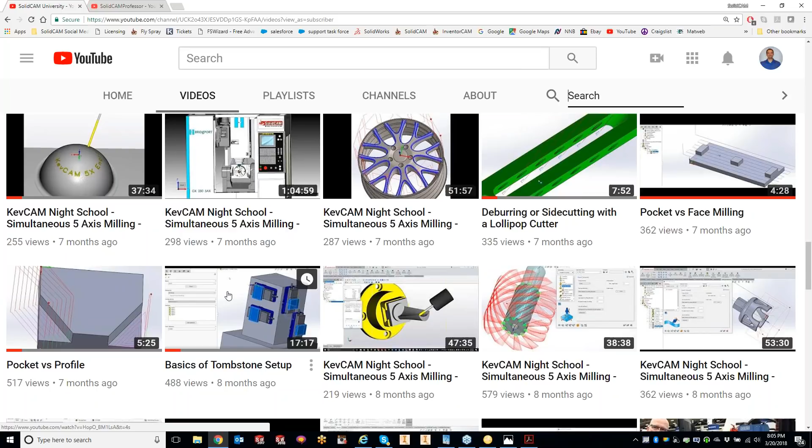What we're going to do today is a sneak peek of what's in SolidCAM 2018, and a lot of this, as mentioned by Steve, came from customer requests. Also our own staff often suggest these changes, and we listen especially to them because many are actual machinists who know the pain of programming parts and what they may be looking for. Listening to people with actual machine practices is very helpful when putting in new enhancements.

I'd like to, can you make me presenter please? Yep, you are, Sid. Okay, and I will show my screen. Hold on a second. I am not presenter. You should be, Sid. For some reason, let me try it again. I'll do it - I got it, I got it, okay, there we go.

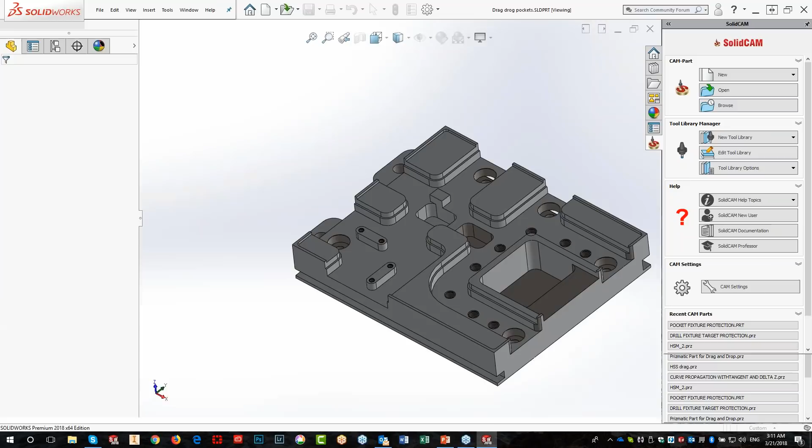What you'll note is as follows: when you open up a SolidWorks part, you already have a SolidCAM tab available to you. Obviously at this point, since no project has started yet, it's empty, but it's here together with your SolidWorks tabs.

It's readily available. Now, there are people I know who don't like working with a task pane, so they'll keep it minimized. Some people don't even like seeing it at all.

What we also have in our SolidCAM tab is the ability to start a new CAM part, open a CAM part, and browse. If the part is already open, we also have an option for save as and close. And we always have the SolidCAM settings available here as well.

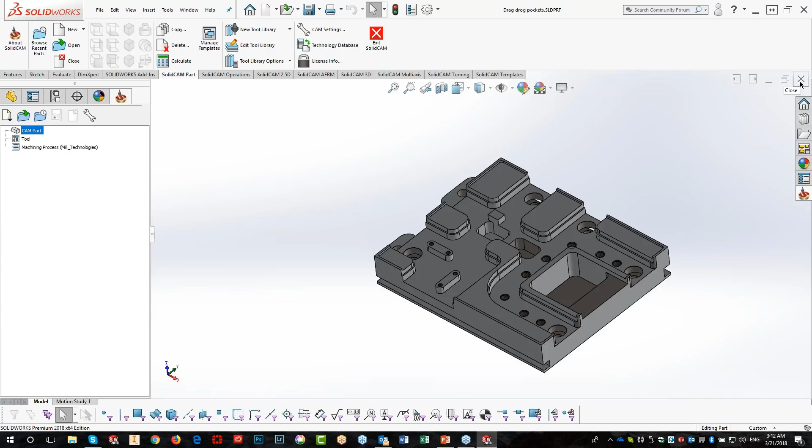These are readily available to everybody at any point, because the tab is already present when you have a part open. Now I'd like to show you another little trick we've added. Not everyone may want to use this, but I'm going to close the part for a moment and go back into my CAM settings.

In my CAM settings, we've added a feature called 'Create New CAM Project when opening a CAD part.' If I click that, along with Auto Select Project Location, and in my automatic CAM part definition I'll have all of these clicked as well.

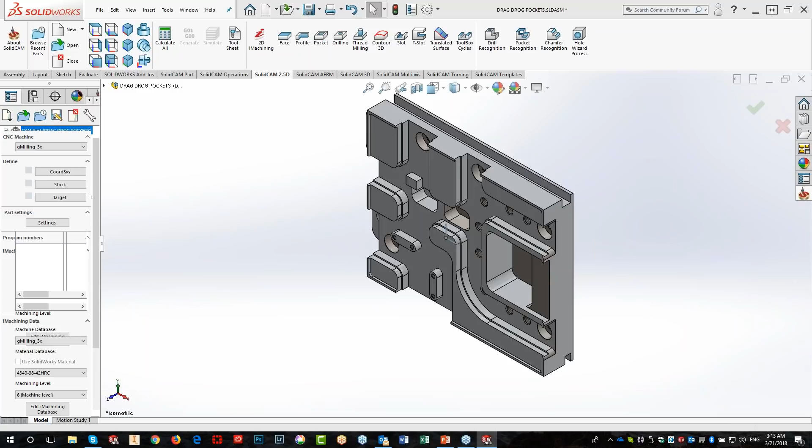Look what happens the moment I open up a SolidWorks part. I'll open up the part, and in just a few seconds I'll be ready to work. We have a coordinate system, stock, target—everything is already done, and I'm ready to start working.

And the home position is created exactly the way you have it defined inside your CAM settings, as to where it goes.

Now, I'd like to apologize to everybody beforehand. I am working right now, like I said, with a development version. As we all know, sometimes in development versions not everything is perfect, and there may be some crashes in the middle that I know about. So bear with me if that happens.

Okay, let me move on to my next feature. One of the pains we always have when creating stock is that if you want to create a box around the part, you would normally go into your stock creation. I'll open that up. You have 'defined by box' and 'relative to model.'

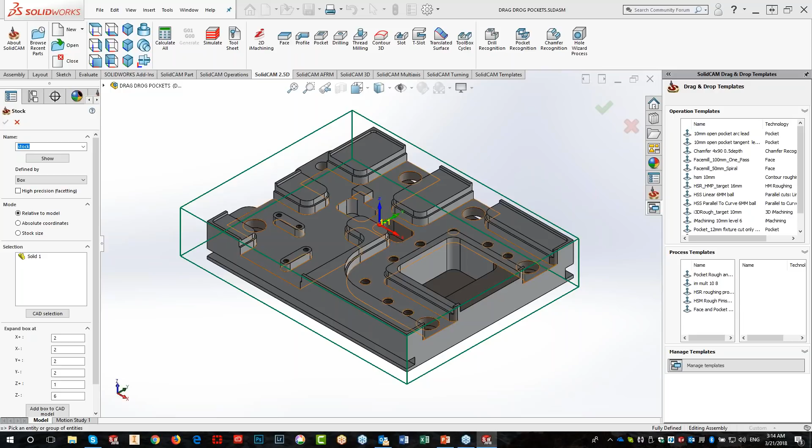You click on the box, you see a part, and say, okay, that's my part, and I want to add this amount of material. By the way, you see the values here—I'm working in metric, sorry about that—that's why it's not 2 inches, it's 2 millimeters. I want to add this amount of excess material on each side, which is nice, but at this point you still don't know what your actual stock size is.

So what you normally do is go ahead and add a box to your CAD model, start measuring each of these lines, and say, okay, that's the stock I need. But then what happens? You call up your manufacturer, the guy who actually gives you this, where you actually order your steel or aluminum.

And you say, okay, this is the stock I have. What stock do you want? In other words, they won't have exactly what you want unless they cut it up for you exactly. They may have rolled out bars of stock and say, these are my standard sizes, what size do you want me to cut it from? Then you have to go back and redefine your stock exactly according to the way he has it.

So what we've done here is we've added another option, and this other option is called stock size. With stock size, when I click on the parts...

If I go further down over here, you'll note that we have a box size instead, in X, Y, and Z. It can be either metric or inch. And here you see exactly what your minimum stock is and exactly what your part size is at this moment.

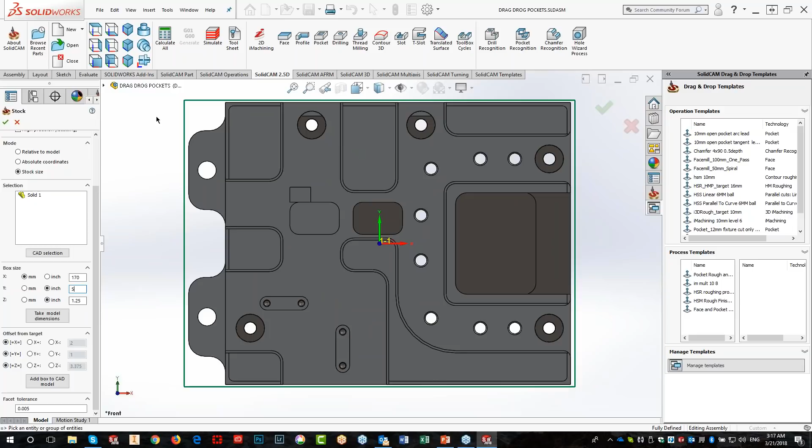When I'm looking at my Z, I'm saying, you know what, I don't want my Z to be only maybe 1 millimeter above the top. So let's go a little further down, and you can see we have offset from target.

Right now, as default, it's set at equal X, Y, and Z. So what I want to do is say, okay, everything is good for X and Y, but for my Z, I only want my Z plus to be 1 millimeter.

And what it does is it takes the entire box and moves it down, and now you know your exact stock size, and it's already ready for you exactly the way you're going to get it from your material supplier. Okay, so that's as far as the stock size goes.

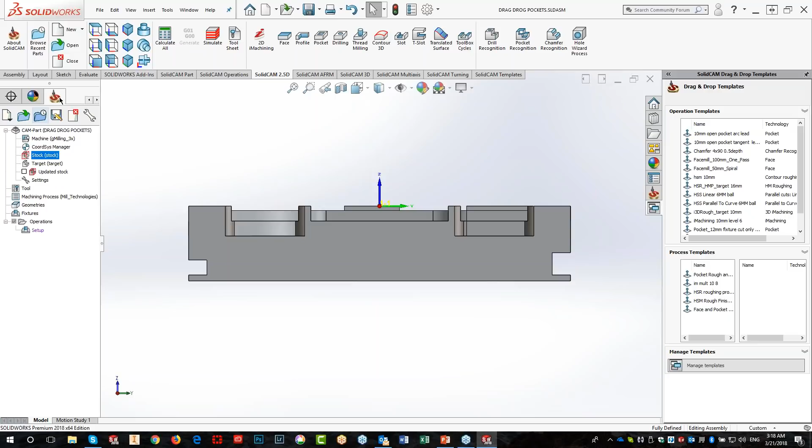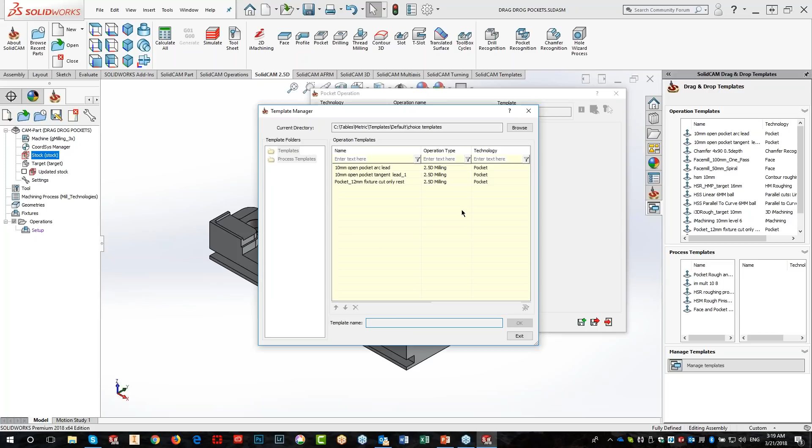Now let's go to our next thing, and this part is really, really, really cool. I'm sure a lot of you work with templates, and the way you would use templates in the past is maybe you go into, let's say, a pocket operation and load your template from your list of templates over here, and then click on that and say okay, and it brings in the tool.

All you have to do is add your geometry, do your levels, and then do save and calculate. Well, I'm going to go out of here.

What we've added, and you can see this now on my right-hand side, inside my task pane of SolidWorks, is something called drag and drop templates. So say I want to have a face operation on the top of this part.

You see I have a face mill template over here. In fact, I have two of them. I'm going to use the one that says face mill 50 millimeter, which is about 2 inches in diameter.

And I'm going to use the spiral cut, that's the technology I decided to use. I'm just going to take it and drag it to the part, to this face of the part, to the top face of the part - okay, even though it's not the top. And you'll note I already have an operation created with the toolpath.

Okay, now the rule is that when I drag it to a surface, it'll use the home position that is perpendicular to that surface. Now, you may ask, I have only one coordinate system here. I want to take a face mill and drag it and put it onto this face as well. Well, let's see what happens if I do that.

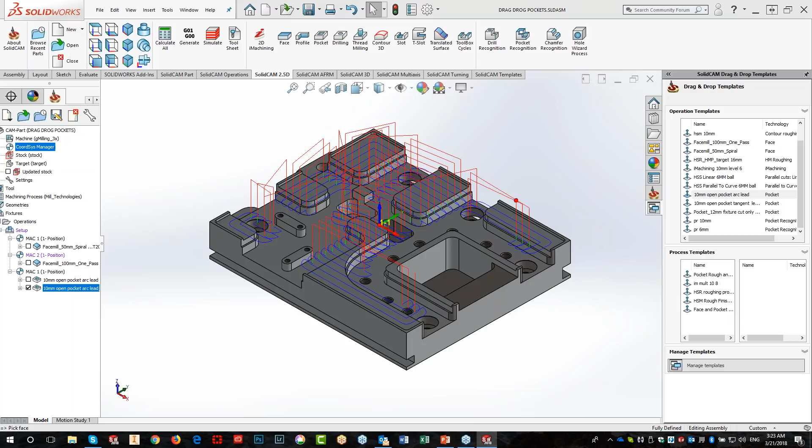I'll start dragging it, but I'm going to my keyboard. I'm going to hold my control button. And then I'm just going to let go over here, click on this one. As long as I'm holding my control button, nothing will happen. Now I'm going to let go of my control button, and it's going to create one operation with all those geometries, with all those chains already inside that one operation.

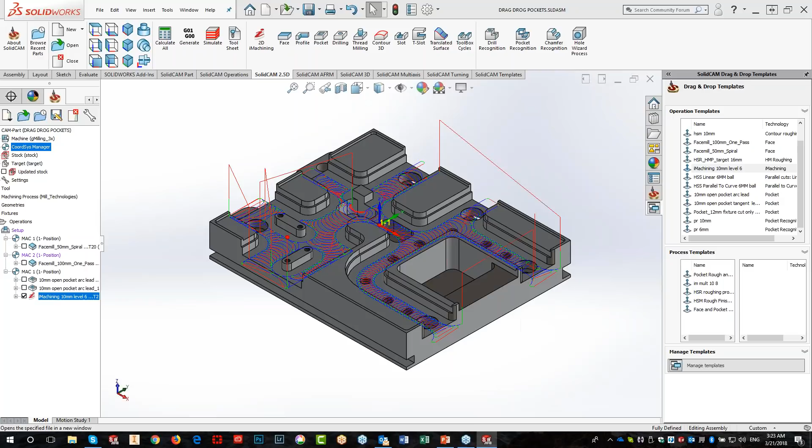Now, this works well, not only here, but it works well also for iMachining. I can take an iMachining operation, drag it to, say, this surface, and it'll build a template with your iMachining. iMachining takes a touch longer to calculate, but you see you have my iMachining toolpath there as well. This will work also very nicely.

Let me just delete everything I've done over here. Delete.

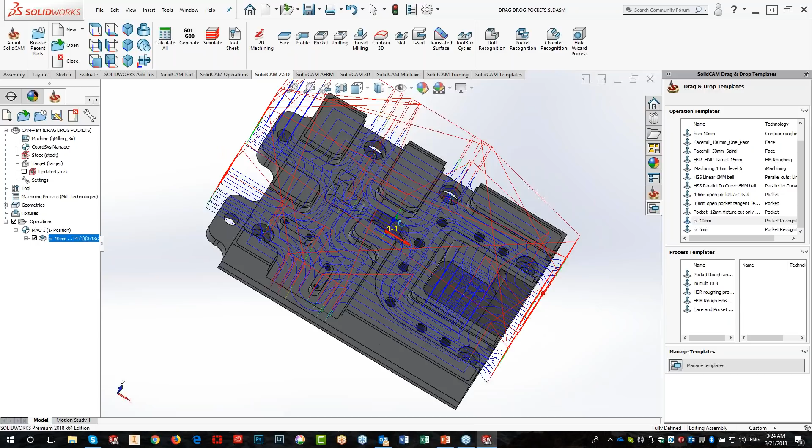It'll also work very nicely if I were to use pocket recognition. Let's use pocket recognition, and I'll hit. Doesn't make a difference now which one of these faces I hit because it can recognize the entire part. It'll build a template operation for this part using the pocket recognition option. Obviously now it's recognizing all the faces. And now every single one of these pockets has a toolpath on it.

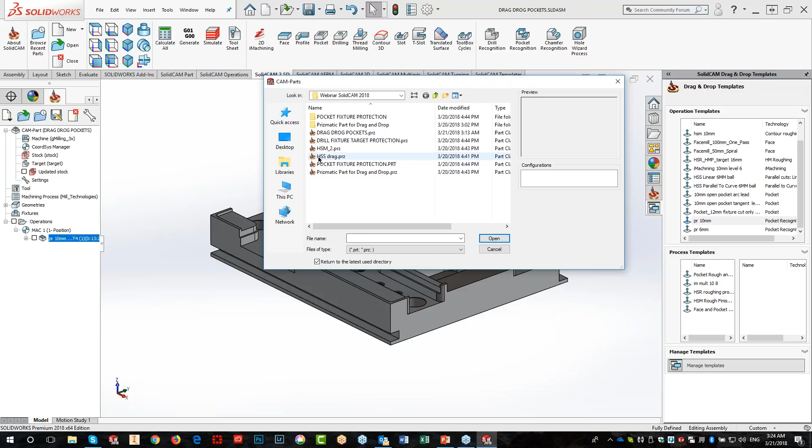Okay. Now, we have this also for HSS and HSM. Now, with HSS, it's a little tricky. And I'll show you what I mean. I'm going to load a different part. I'm going to load this part over here. And let's say I want to do an HSS operation on this surface.

Now we know that with HSS, the geometry does not need a specific home position. So the question is, if I drag and drop something onto this surface, what home position am I going to use? Another question would be, with HSS, touching a surface is not enough in many cases. Touching a surface, I also may need a certain boundary. So for those particular cases, this is what we've done.

I have here right now two different HSS drag and drop options, I believe. Here we go. One with linear and one with a parallel curve. Let's first take linear. I'm going to drag it to this surface here. What's going to happen right now is it's going to pop up a question for me to choose which home position I want. So I can go in here and choose any home position I want. I'll click on OK, and then it'll create the operation. Because linear does not need any kind of boundaries, it just needs the face. So there's my toolpath using the HSS.

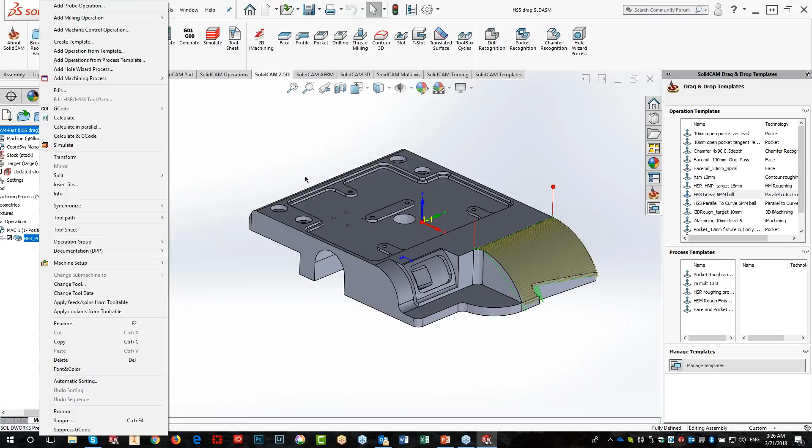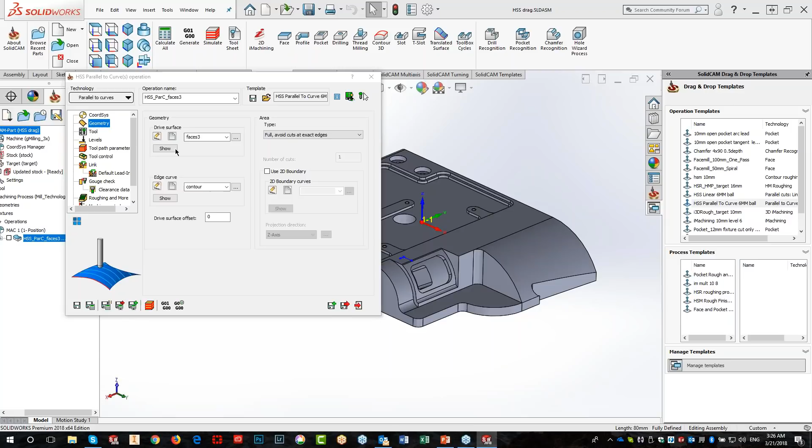What happens if I use one that uses parallel to curve? I'll do the same thing, drag it on that surface. We'll have this option over here again, but then it'll open up the operation, and all I have to do now is put in the curve that I want. For example, if I want it to be parallel to this curve, I'll just add that curve in, accept it, and then calculate it exactly with all the information already inside the template. And we have our toolpaths already created as shown over here.

Now, this works on drag and drop templates, but it also works on process templates. Let me open up a different part. Let's say take a part like this one over here. Now, this is a part you can see that has all different types of pockets and stuff like that.

And what I'd like to do in this particular case is use a process template. Now, when I click on a process template, you can see exactly what's inside of them. Here I have two different pocket operations: iMachining multi-tool, HSR, HSM, and face and pockets. I'm going to use face and pocket recognition for this particular part. I'm going to take it and drag it onto this face over here. It doesn't make a difference which face, because the face mill and pocket recognition will use that entire part and is building the template operation.

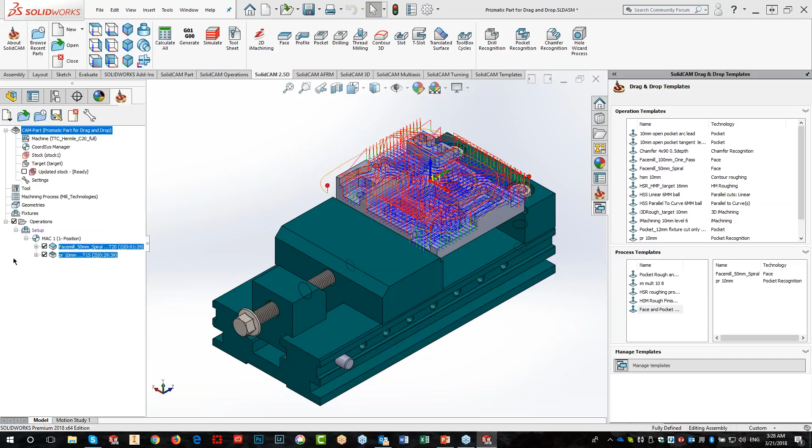For those guys maybe a little fresh on this, what Sidney did is he created a template. By creating a template, all he did is created an operation and saved that operation out as a template. Where other companies, you have to build this huge, large matrix in an Excel file to tell it to do a pocket with an end mill if it meets this parameter and all that stuff. So this is very easy to use here. And we're not hitting the easy button here and saying program my entire part. We're using a powerful software and making it easier for you guys to use.

Exactly. Basically, it's using the technology that you use because you're the one that created this template. Absolutely. And I'm going to create templates also in a moment, so I want to show you what happens when you create a template, you'll see it here automatically as well. Okay, now I've used this, as you see, on this part.

Let me take a different part. Okay, let me close this part. Oops, sorry, I closed SolidWorks accidentally, my mistake. So I'll reopen SolidWorks. It's 3 o'clock in the morning, don't expect me to be... Sydney's just working on his 4th cup of coffee already for the day.

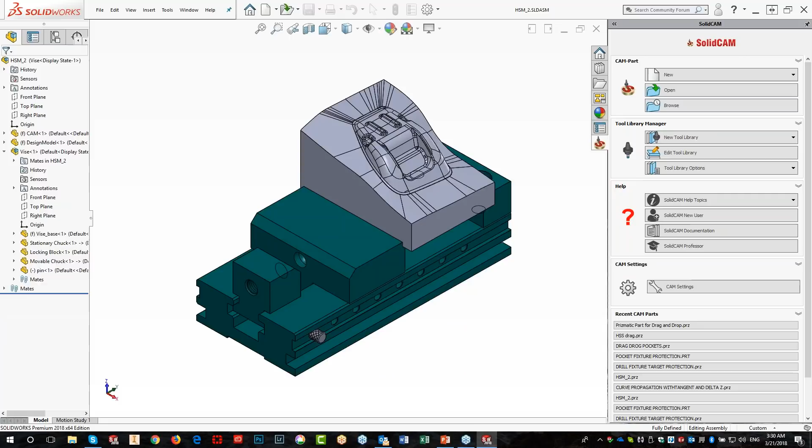Okay, so I'm going to go to my task pane. I love the task pane. I don't know what, ever since I've been working with the task pane, I don't know how I've been working without it. Okay, so let's go to open, and I'm going to use this part over here. Now, this is a nice little 3D model over here.

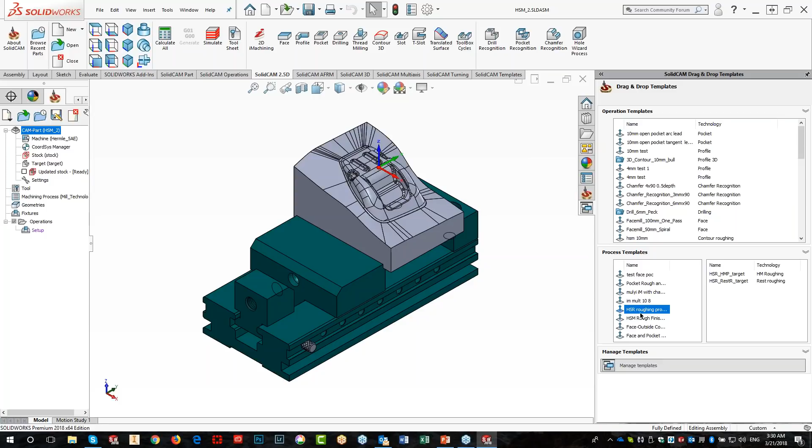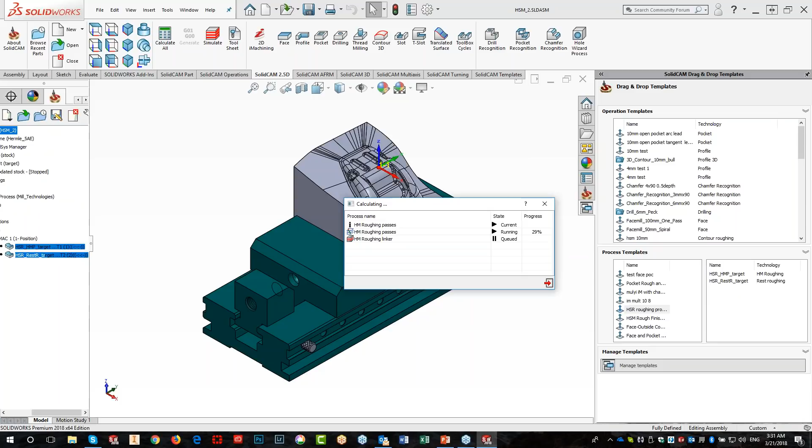What I'd like to do is use one of my process templates to create HSR roughing for this part. I have some of these objects over here, and you'll see I actually have 2 different operations inside my template. All I have to do is drag it to any one of these surfaces. Since no home can be detected, I'll just click on the home I want. And there we go, we have our operations being calculated, and in just a couple of moments we have our operations already done. Again, like I said, any one of these operations is just a regular operation, and all you have to do is go inside if you want to make any changes, just like any other operation you may have had in the past.

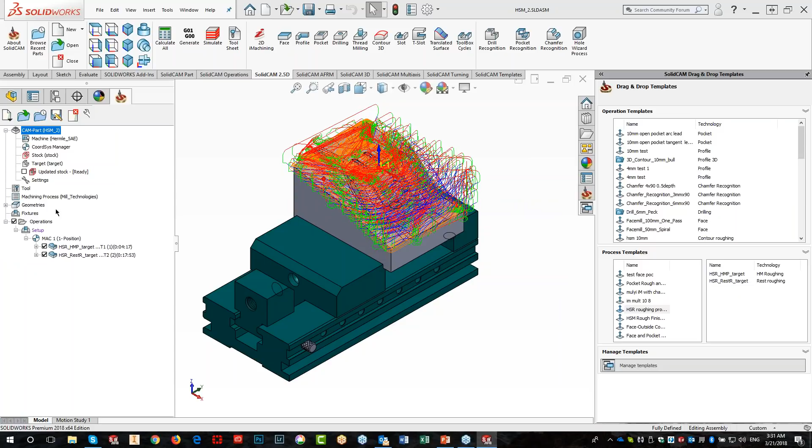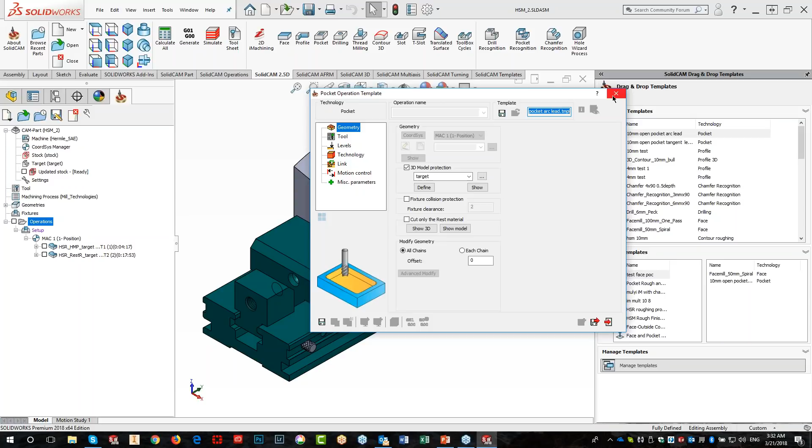Just a little bit more on the drag and drop. These drag and drops over here, we also have the manage template added at the bottom. If you click on that, you can go ahead and manage all your templates. In addition, if I right click on the drag and drop, I can show and edit, opening up any one of these templates to make edits and changes the way I see fit. I can do that or double click on them and it'll open that as well. So it makes going into and editing templates a lot easier.

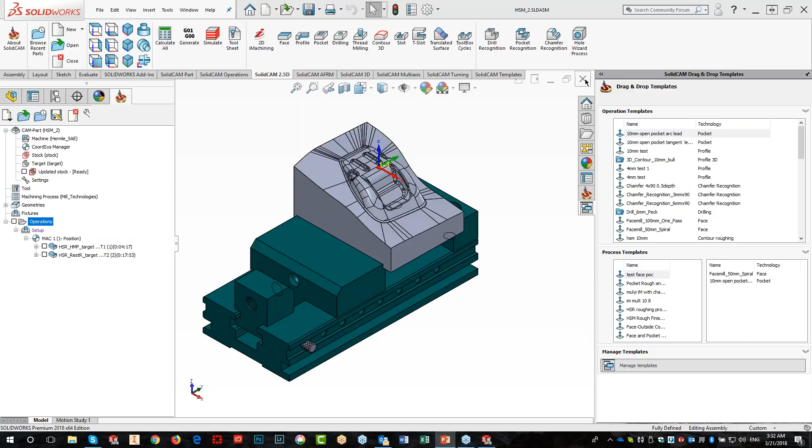Okay, let me go now to my next little step that I'd like to show you. This is going to be fun. I'm going to open up another part. We'll go to SolidCAM open. Like I said, we will have these every now and then.

This is one of the great joys of beta. No, again, this is a dev version, so this happens. Yeah, and that's why we go through as much testing as possible for you guys, so you don't run across any of these issues at all. Right.

Okay, again, I'll load the parts. Here we go, we'll go to open. And I'm going to drag out this little part over here.

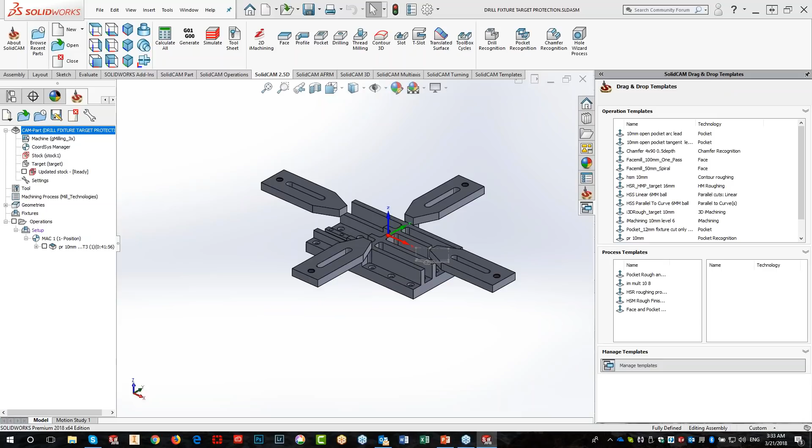Now, what you're seeing here is a part that has drill operations I want to create on this part itself. I'm not even going to use a drag and drop template, so I'm going to close the task pane now so it'll be a lot easier for you to see. You can see I have these holes over here that I want to drill out, and you can also see that I have clamps over the part, different fixtures over the part itself. I've already created an operation over here.

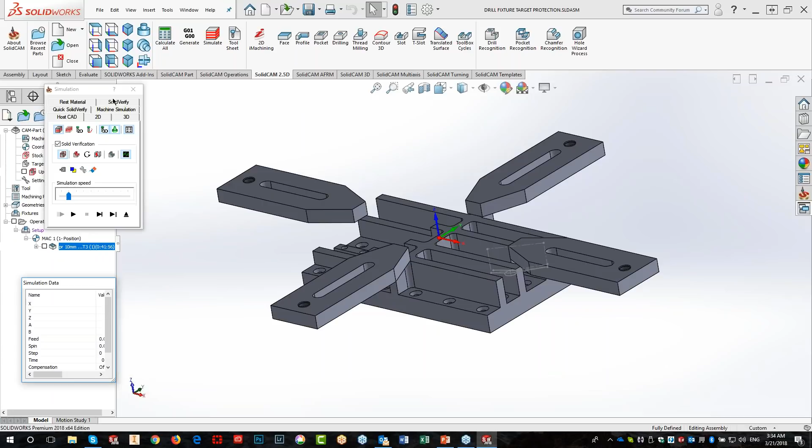I'll just run the simulation of this particular operation, SolidVerify. Let me do that a lot quicker. You'll see that that's the material I have left over, and you can see also there's material left underneath the clamps itself. Now, there are holes over there underneath the clamps. And you'll also note that the holes are all the way down at the bottom over here.

So I'm going to start now a drilling operation. I'll create my geometry. Let's do this in the top view, it's a lot easier, and I'm going to create my geometry using these surfaces over here. I have all those holes that I want to use, and I'll accept that.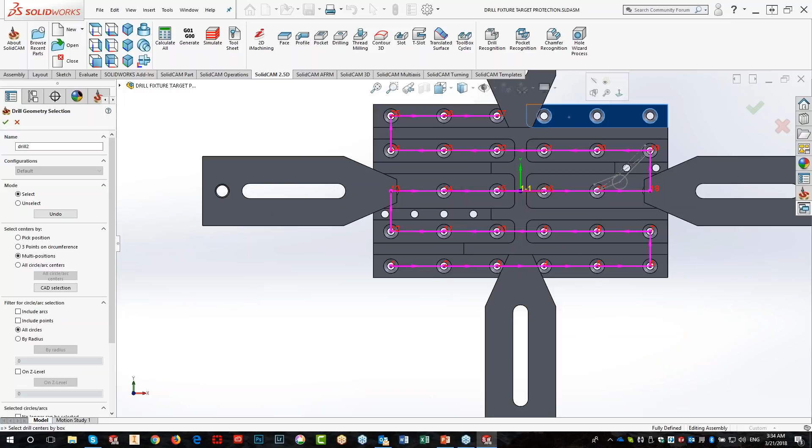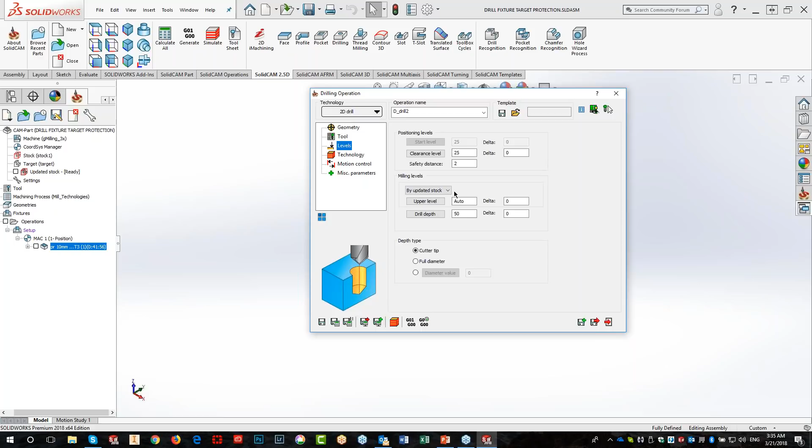I'm going to use a particular drill that I already have ready for me, 6.6 millimeter, that's the size of the hole itself. What I'm going to do now is go to my levels. In my levels, you'll note we have something called updated stock, so in other words, it's going to look at the part and see where your stock is at that point, and that's going to be your upper level. My depth, we'll leave it at 50 millimeters, full diameter.

Now let's also go into my technology. In my technology, we have something called Fixture Collision Protection, so it'll automatically recognize where those clamps are and make sure I don't go drilling into those clamps. I can also have a fixture clearance protection distance, how far away do I want to stay from the fixtures. And we also have added a new option here called links between the holes. In this particular case, I could go safety distance from upper level or shortest distance. Now, this is really cool.

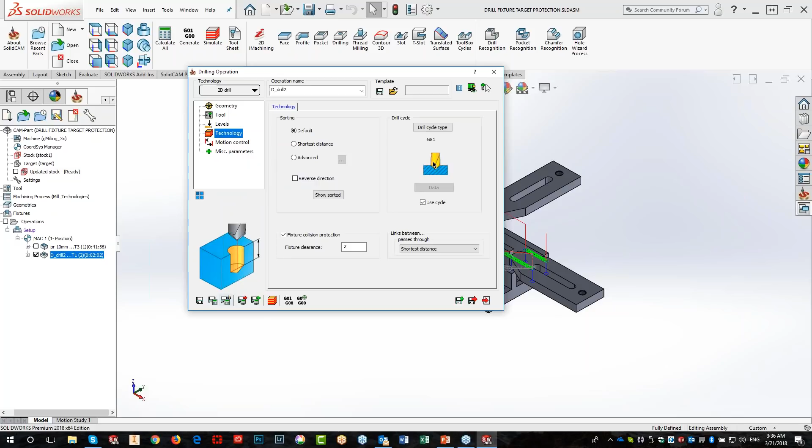I'll show you what happens over here. I'm going to hit calculate, and what you're going to see is something very interesting. My tool path, my drilling will start at the level of the holes itself, but it'll go from one hole to the next directly over the material over here.

Now when it gets to a clamp, it'll jump over the clamp. Let's take a look at it in our simulation using SolidVerify. I'll do this one step at a time, and you'll see my tool will drill down, go directly to the next hole. Now it's going to jump up above the clamp, skip those holes because it was right next to those clamps. Go over there, go over here. Now my next hole is on the other side of that wall, it's going to jump over that wall and go to the next hole.

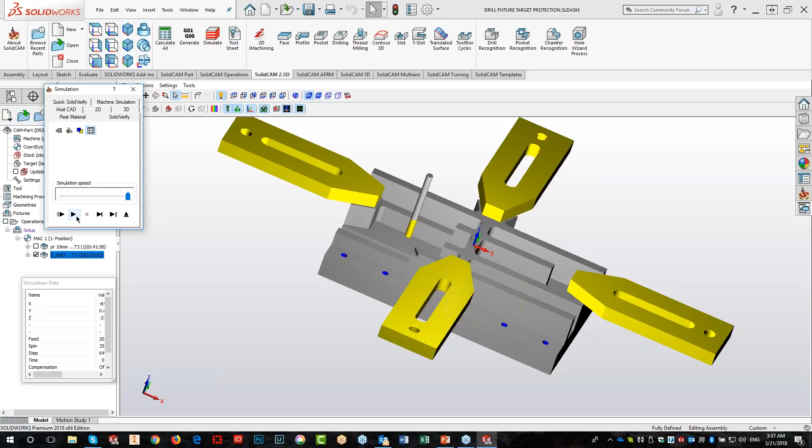Same thing over here, there's another wall it's going to jump over. Now over here, what it's going to do is jump over this little wall that I have over here to get to the next hole over here, also skipping the hole that was underneath the clamp, thereby also creating all the holes that it was able to create.

This will really help with eliminating cycle time, especially if you guys are running production and custom stuff, eliminating a lot of the cycle time of retracting all the way up to that surface plane since we're using those clamps for you guys.

Let's take a look at what happens if I take my first operation and suppress it. In other words, my stock right now has changed. The stock has not been machined over there. You'll note that my drill operation just has to be recalculated.

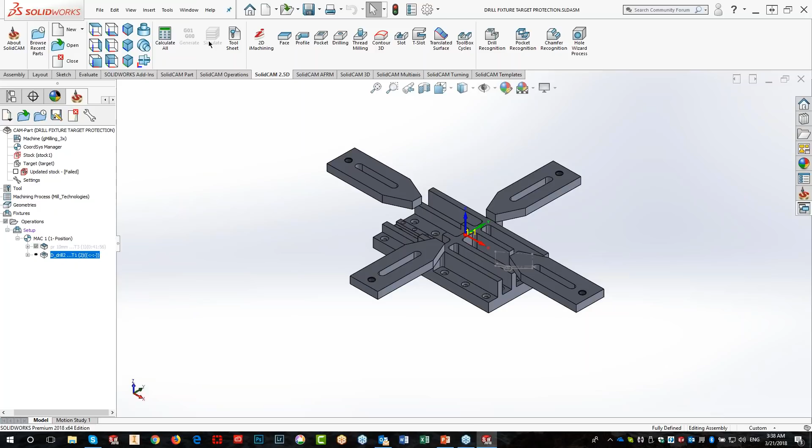I'm going to just calculate it. I'll click, actually I can just do calculate all over here. You'll see that this time the drilling is starting to again simulate from the top. It'll jump over my clamp, but the starting of the drill will start from the top, and it'll go down to exactly where it needs to go down, and it'll complete whatever you need to do over there.

Now you'll note also one little thing. When I click on this, you see this arrow over here? This shows us that we have this in SolidWorks as well. It shows any associated operations. So if I have an operation that's associated to several operations, it'll show it to me.

That's a good sign for me to do the following. Let's say I'm going to unsuppress this now, and I'm making a little change over here. I can click on Save and Calculate with Related Operations, and it'll calculate that particular operation I'm on right now, and it'll also calculate any related operation as well.

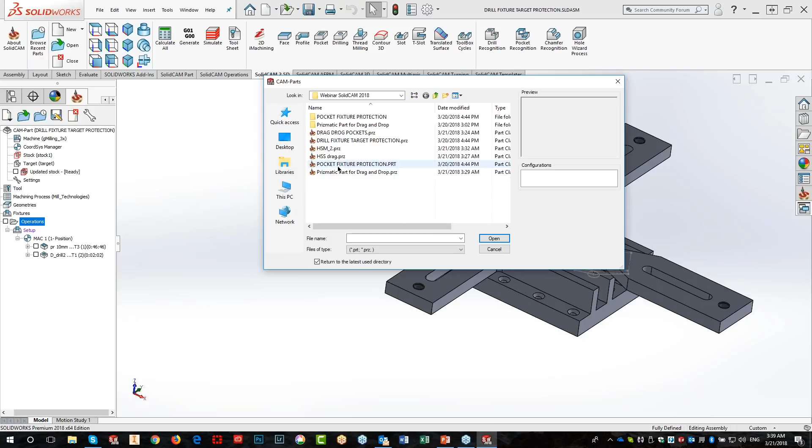Okay, let's move along now. Let's take a look at a different part. I'm going to open up a different part: pocket fixture protection.

Just like we had in drill, we have the fixture protection. We also have it now in pockets as well, but we have a couple more options in there as well.

Let's take a first look at this part. You'll note I have two different setups here. If we take a look at my configurations over here, I have my default setup and I have setup 2, two different clamps in different places. So I'm going to take my first operation, my first setup.

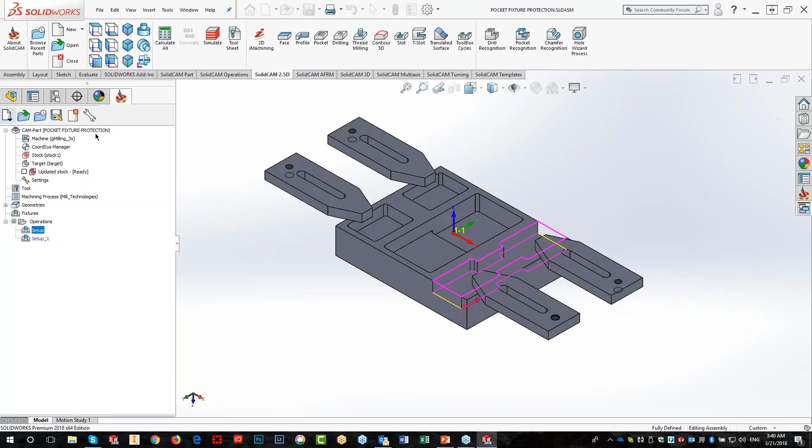I'm going to take a pocket operation. My geometry is going to be this surface over here, where it automatically, as Kevin mentioned before, recognizes the open edges. I'm going to use an end mill, say for argument's sake, a 10 millimeter end mill.

Let me go back to geometry for a second. Note we have what we call fixture collision protection, just like we had over there. And we also have something called cut only the rest material. I'm not going to use this time now, I'm just going to leave it there without it. I really don't need it at this point.

I'm going to calculate. Okay, I have my levels, all that is as usual. My levels is down to that surface over there. My technology, I like working open pocket using a profile strategy. Links, I'm going to use it as an arc, whichever way everyone likes to use it. Okay, I'm going to calculate that.

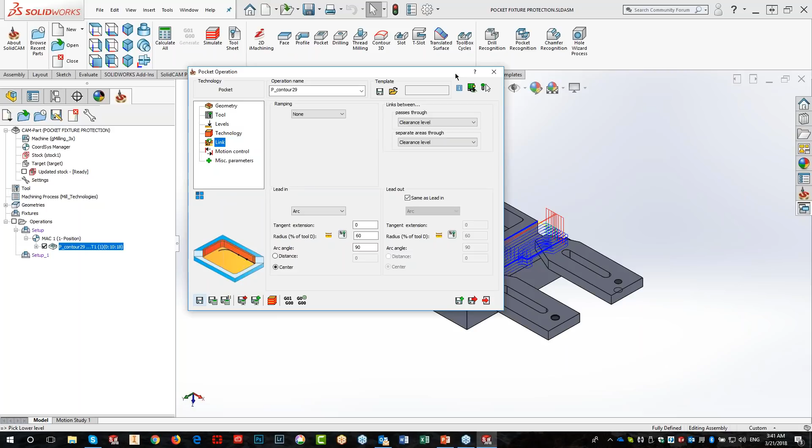And you'll note the following: it did the pocket, but it worked around the clamps.

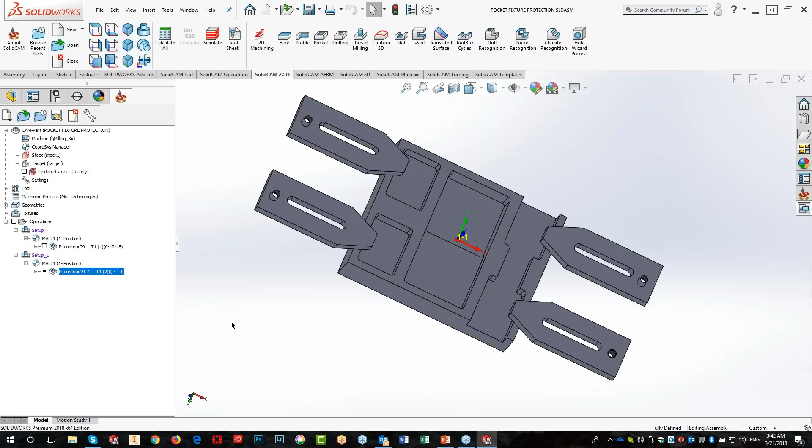Now, what I'm going to do, I'm going to take this same operation, copy it, and paste it on setup 1, where I have my clamps in the other direction. In this particular case, I'm going to add the option of cut only the rest material. So it's the exact same operation I had before, but this time I added also cut only the rest material.

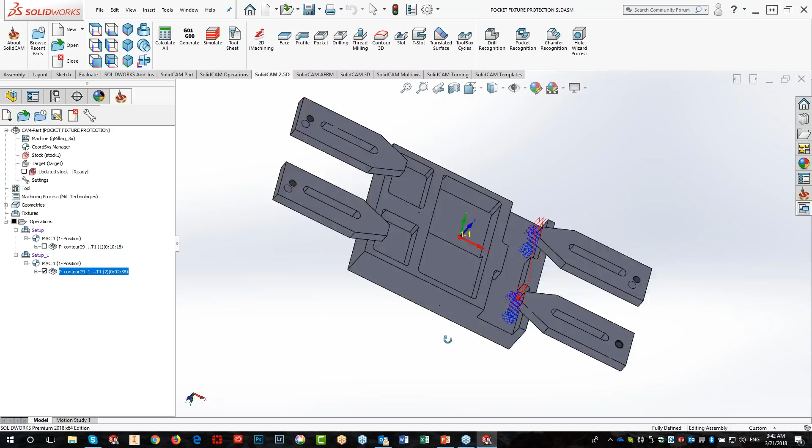When I calculate that, what you'll see is that it's only machining where it needs to be machined, in those areas over there. That's after you've already moved the toe clamps out of the way.

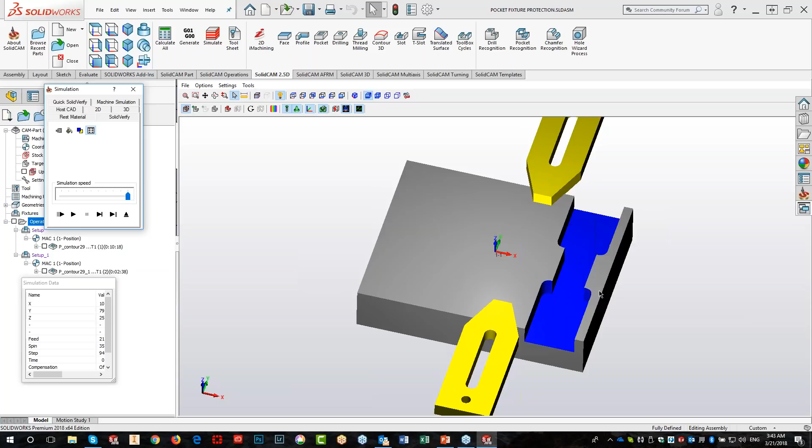That's correct. So if you go to your configuration, get that simulation, you'll see this exactly a lot better. We have our first operation. Now you see our clamps are moved. And then we have our second operation, finishing off those studs that were left over there.

Now, the same is true, not only here, but also in pocket recognition. But let me just delete these operations here for a moment. And you can see, because we have the cut only rest material, these operations are now related to each other. Let me delete this now. Delete.

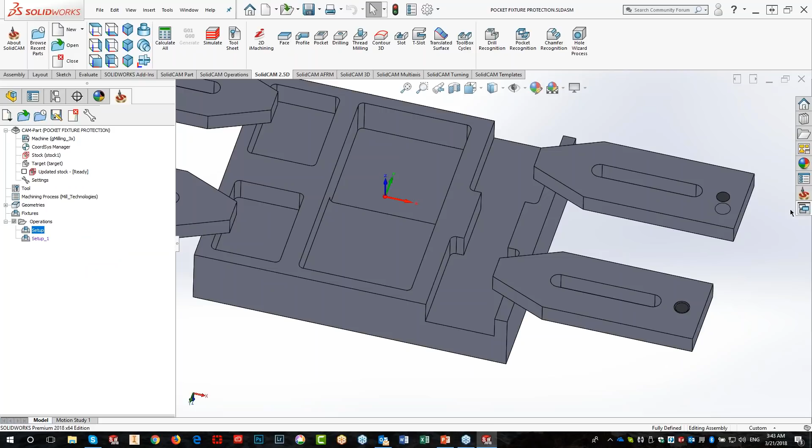Remember we talked about a couple minutes ago about our drag and drop templates? So what we have here is I created a pocket operation that already had inside the template itself. Let me just open it up for a second. It already has inside fixture collision protection, and it also has cut only rest material.

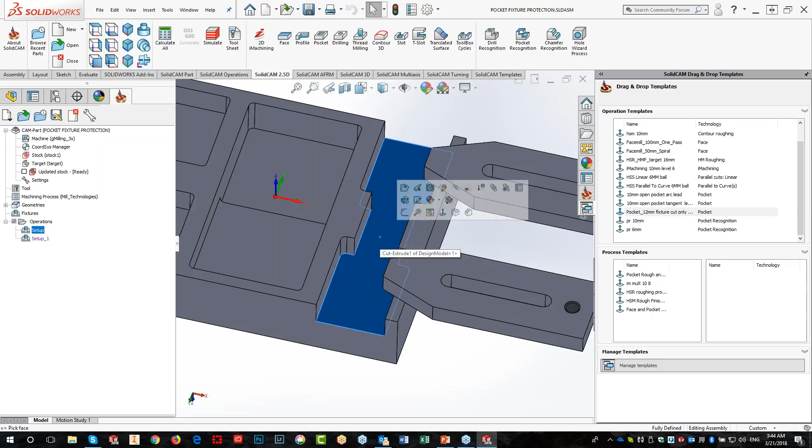So what I'm going to do is just take this and drag it onto that pocket over there. As you can see, it did that. And now I'm going to go to setup 1 and drag and drop it again to that same face. Same operation, just different setup, sees the rest material, and cuts exactly where I need it.

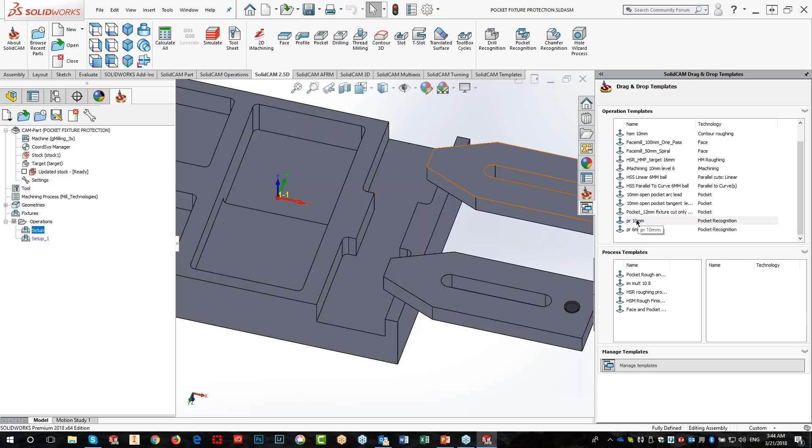Now, this is also true. The whole idea of pockets with fixture collision protection, we've also, correction, I'm going to delete that for now, is also true, not only in pocket, but also for pocket recognition. Let's take a look at this pocket recognition over here. I'm going to add fixture collision protection to it. You see, I made a little edit as we're going along.

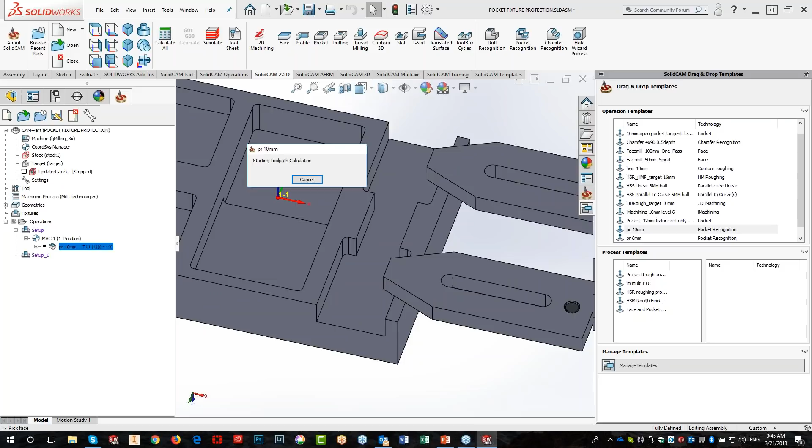If I were to take that and drag it to my part at setup 1, it'll do all the pockets and move around the clamps over here as well as these clamps over here. Go to this part now, do the exact same thing. Don't fail me now. There we go. As you can see, it worked exactly where it needed to work.

So the drag and drop options is very simple. Now let me just go back also, and you see the drag and drop together with the new features of collision protection, rest material. All of that comes in extremely handy now when you have templates and using the drag and drop templates. Now let me go into a simple operation that I have here.

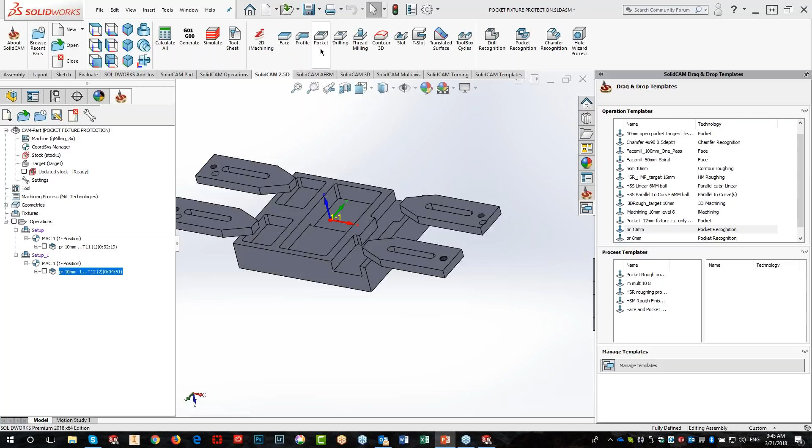Just for argument's sake, one nice thing too with this drag and drop for those of you guys that like to use 3D iMachining for your prismatic parts, this works also very nicely. So drag and drop that 3D iMachining toolpath on there. Don't have to worry about those feeds and speeds for you guys on a 2.5D part. Also works out very slick.

And if you guys behave yourselves, I'll even show it to you in a moment as well, what happens when you drag and drop the iMachining 3D iMachining operation onto a prismatic part.

Okay, but let's go back in here for a moment. I'm going to go into here and use all these options over here. I may even, just for argument's sake, just create a geometry, levels, irrelevant for now, technology, open pocket, use profile strategy, approach from outside, whichever one I want to use, all these kind of things.

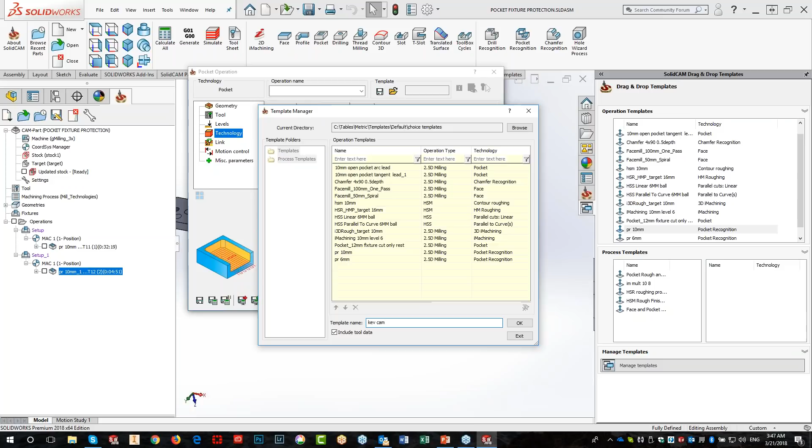What I'm going to do is I'm going to create a geometry. And so as you can see the name of the template, I'm going to create it KevCAM. The name of this particular template. Click on OK. I'm going to exit the part without saving anything.

In this particular case, there is a little bug over here that I just noticed. What I will do is I will just reload the part. And what you'll see is that I have that template there. So any template I create will be available over here as well, immediately. Actually, it will be immediately. The fact that I had to open and close, that's a different story. That I have to scream at somebody for that.

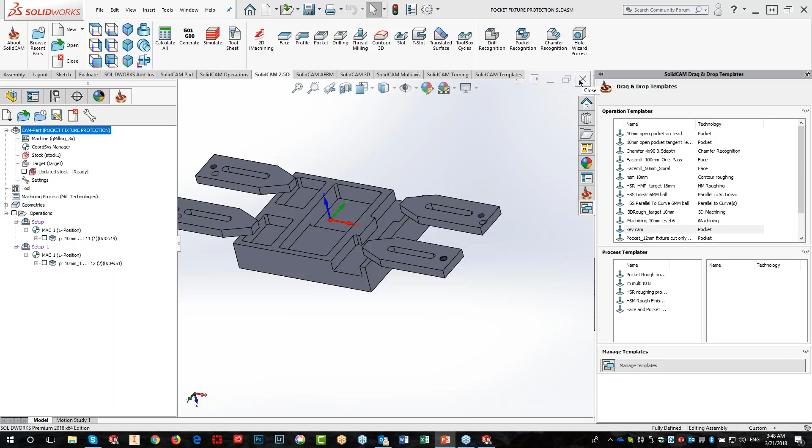Anything else? Let me see right now. Okay, now let me just show you one last feature. I did promise I would show you iMachining. So what I will do is I will reload that little part that I had over here, this one over here. I'm going to delete these operations.

Now I have a template here. iMachining, let's go to technology names. I have one here called 3D iMachining. I'm going to take that and drag it to my part. And as Kevin had mentioned just before, there's my toolpath on the entire part using iMachining. Done very quickly, very simply.

Nice and easy, and you don't have to worry about feeds or speeds and all that good stuff. Right, exactly. And again, every single one of these operations, you can go into them and edit them. Let me delete this now.

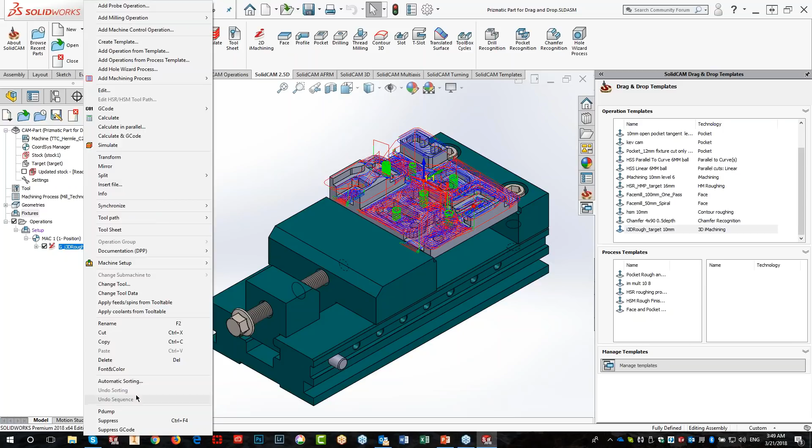I want to show you the last thing for this particular session, something in iMachining itself. Many times when you do operations, particularly in iMachining, you're going to be using more than one tool - one for roughing and another for finishing, or for rest material. What we've done in iMachining 2D and 3D, right now you see the technology says iRough. What we've added here is something called multi-tool.

If I click on multi-tool, you'll note the tool list that comes here is empty for now. I'm not going to do anything there, I just want you to pay attention to it for a moment.

Okay, I'm going to create a geometry. I'm not going to use this part, I'm going to use a different part - it looks better on a different part. I'm going to browse, and I'm going to use, let's say, this part here. Yeah, this one looks nicer.

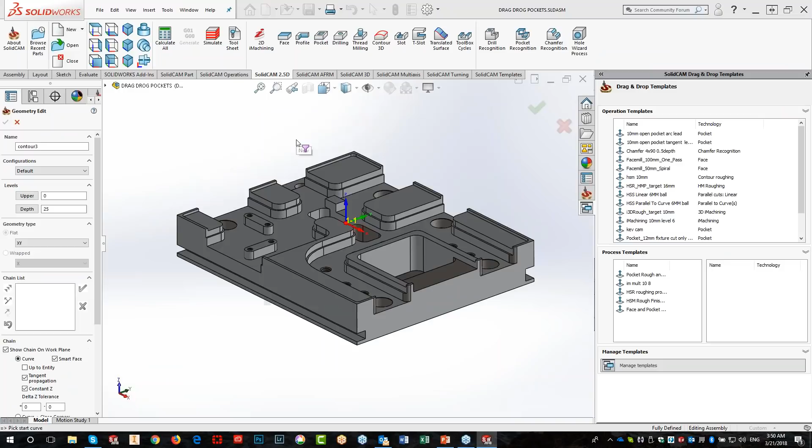Okay, let me delete this operation. iMachining 2D. I'm going to create my geometry, click on that surface over there. You can see all my chains were added. And the tool that I will be using - well, I said I want to use multi-tool.

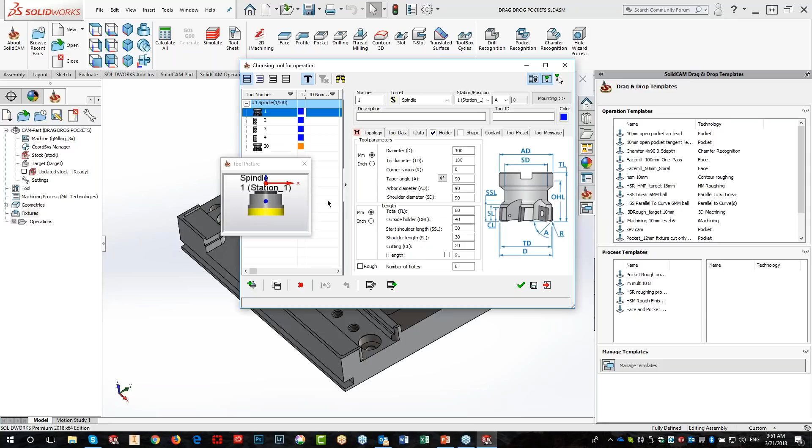So let's go to iRough and change that to multi-tool. What you see is you actually have a list of tools. Now go to the first one, say select. I'm going to select a tool, say a 10 millimeter end mill, with all the information that I may need. Now note, I have my first tool over there.

I can tell it at this point if I wanted to also, besides the roughing, do finish on walls or finish on the floors. I'm not going to do anything over there.

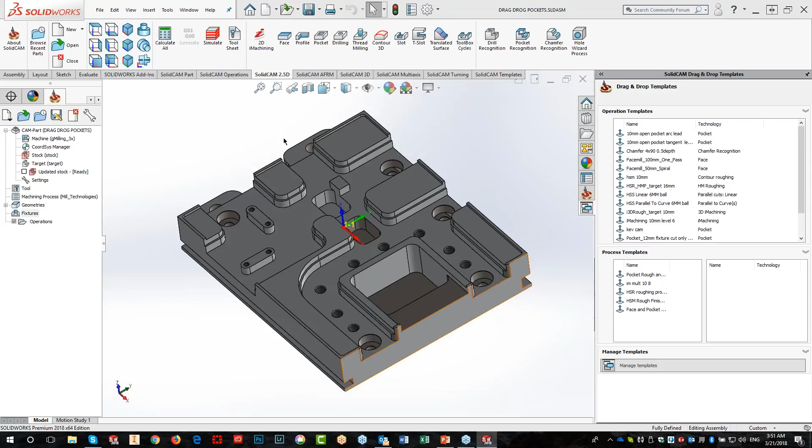What I'm going to do now is select another tool. This time I'm going to select a tool - let me see if I have one here that's smaller. I don't, so I'm going to add another tool. I'll add a 6 millimeter end mill, relatively small tool. You see I have that new tool added over there. And for this one, I want to do finish as well.

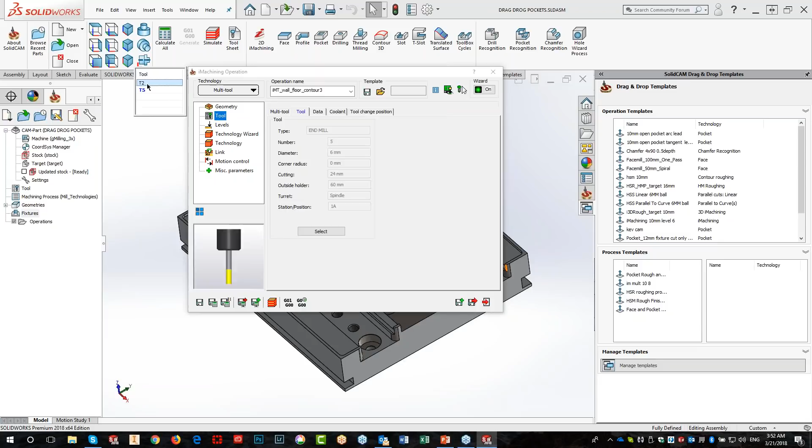Now you'll note that on my tools, on this tab on the side, it shows me the different tools. What does that do? If I go to the tool list over here, I go to tool, I see the information about this particular tool. If I click over here, it'll show me the information for that tool. But it gets a little more into that - if I go to my technology wizard, when I click on tool, I can see my technology wizard for that tool. For T5, it'll show me the technology wizard for that tool.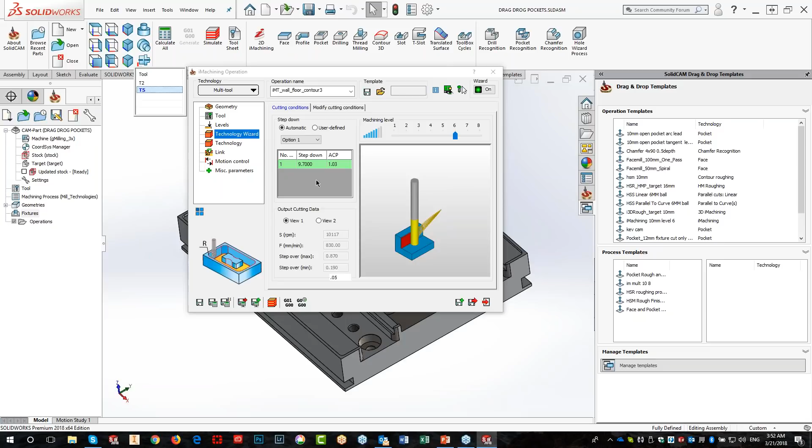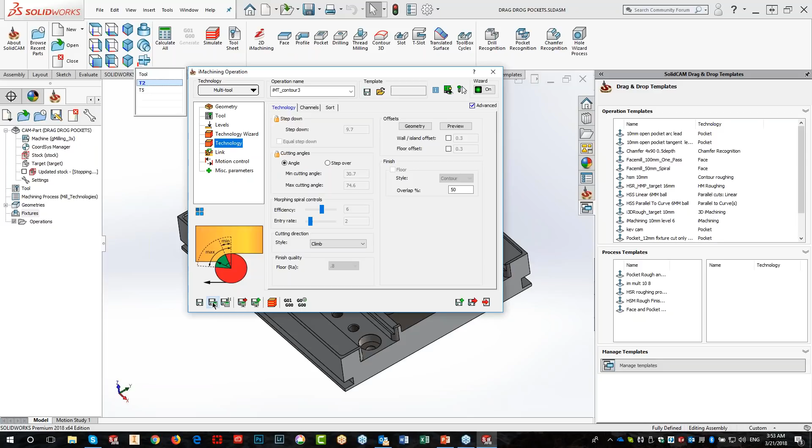So I can have the technology wizard set for each tool individually. Now, if I go into my technology as well, you see this one, T5, is doing finish work, whereas T2 is not doing finish work - it's only doing roughing. Now, when I click on Save and Calculate, it's going to obviously calculate the operations.

You see 2 operations were created. Okay? Let's stretch this out a little over here. 2 operations were created - we have a first one and a second one. If I go back and edit, it'll open up again those operations. These 2 operations are connected to each other via multi-tool. They can't be separated because this is a multi-tool operation.

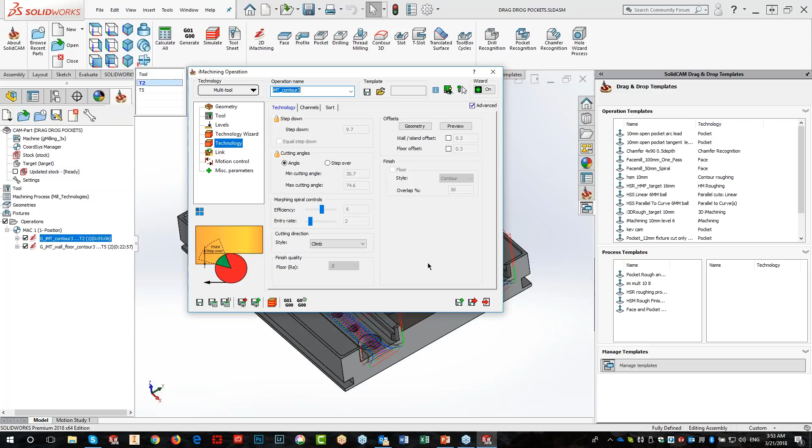This is where it comes in really handy if you guys are using a roughing tool and you want to use a separate finishing tool, but you're able to keep it all within one operation for you guys. Right - instead of having to create 2 separate operations, it's all there in one operation. Okay, yep.

Do we have any questions? We do have - Brad Denton mentioned adding a tab to filter process selections and cleaner. Is that adding a tab to where? Just adding a tab to filter out stuff, I'm guessing. And Brad, if you want to fill me in here, or fill Sid on.

Let's see, operation template types. So what Brad is saying is over on your operation templates, let's say you have 500 templates in there. If you could filter it out by all the face milling operations or all the pocket operations, that kind of filter. Okay, I got you. Understood. So what you're basically saying is adding a filter over here.

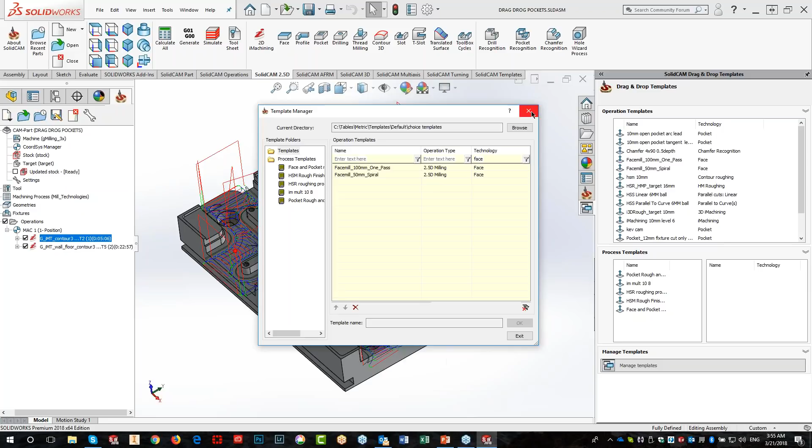So as we go along, we will be adding a filter also to the drag and drop templates. Good question. I had Brad, he'll email me that question so I can send that off to you as a reminder too. Because I know it's early for you.

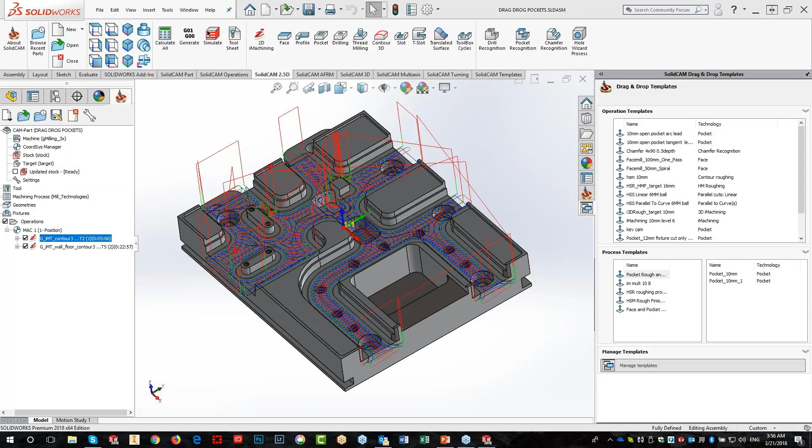Ronnie was saying, very impressive. Note when drilling, buried the flute in the stock. Is that, Ronnie, were you talking when he was doing the drilling operation with the automatic updated stock? Yes. So, Sid, do you want to open up that part that you were doing with the drilling with your fixtures? Sure, no problem.

I think what Ronnie is saying is when you suppress... basically, is that okay? Hold on a second. There we go. He's talking about. I'm going to suppress this again. And over here, you'll see a lot more easily what he's talking about. He's talking about, if I do simulate now, for that one, here we go.

Simulate, do solid verify. If I take a look at the tool, this is the cutting length over here, but it's actually going way in, past the flutes. Legally, there's nothing wrong with that. I mean, there's nothing legally wrong. However, as a machinist, I would not do that.

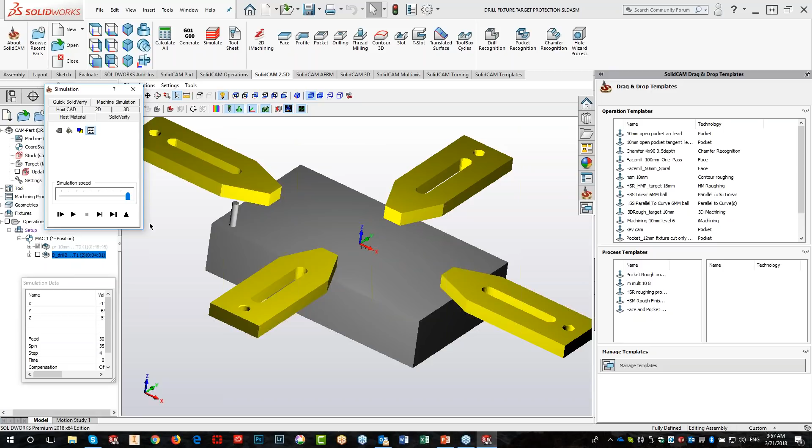Yeah, we'd have to set it up as, instead of doing your drilling operation, if you set up your template as like a peck drilling kind of deal. Right. You can do whatever you want.

Now, by the way, the drag and drop templates do not work yet on drill operations. The reason for that is that right now there's an issue of picking up the correct depth of the hole. Also, you can have several different diameters on there, and which diameter do you want it to do? So we have to work out still the idea of filtering out before getting to geometry, and also a way of picking up the correct depth to the hole. We are working on something, but I can't say exactly what that is. But you can't do it right now.

However, having said that, any one of the templates, if I had a drilling template over here, let's take this operation for example. I'm going to save it as a template. I'm just going to save it right now as a template. Okay, you see it over there. It's been saved as a template. I'm going to delete the operations that I have over here. I'm going to delete this one here.

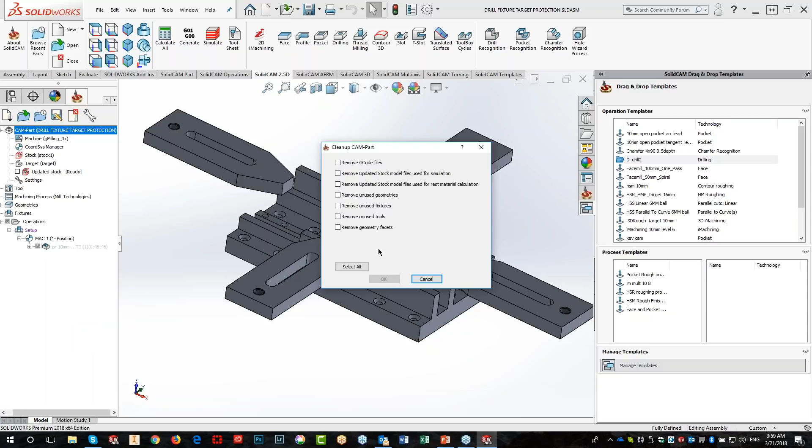I may even do something like this, clean up CAM-Part, so we have absolutely no remnants of whatever was there before. I can take any one of these operations, not only drag it to the part, but I shall also drag it to the CAM tree. In that particular case, it'll work just like any other template.

So whatever I have inside a template, let me just cancel for a moment. Okay, let's say if I go inside this template and I go to my technology and I'll change that to G83 for pecking, and I'll put in whatever information I want to have in there. Say I'm going to go down every 3 millimeters, whatever. Full retract. I'll resave that. I'm just going to save that and exit.

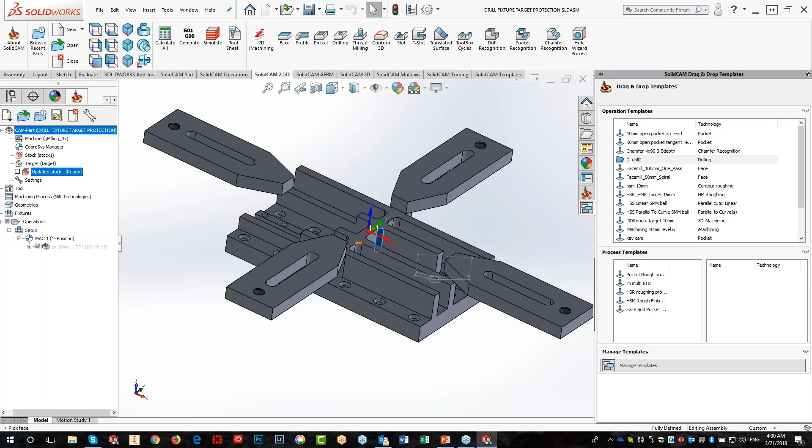So I can take now that template, drag it to my cam tree, define my geometry, save that for now. I can put my upper and lower levels in over here as well. If I want, I actually wouldn't want to do that. I'm not going to have that actually over there. Just says okay, and you see I have my operation over here. It's all over here, just calculate that.

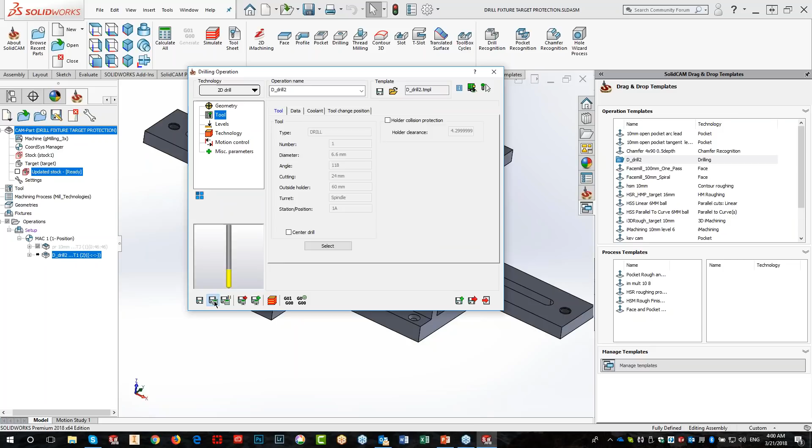This works just like any other template. If I have my technology, if I have fixture protection in there, shortest distance, all that will be in there. So right now I can drag and drop templates to this area over here as well. Let me delete that for a second.

Now you'll note I deleted that operation. We have the geometry over here. I can take the template, also drag it to the geometry, and it'll create the operation exactly what's inside that template together with that geometry. This is true not only for these type of templates, but all the templates, I can drag them to the cam tree as well.

William had a question, and we wanted a bit more detail on what he's getting at. He's asking about the projected availability of SolidCAM 2018 - when will it be released?